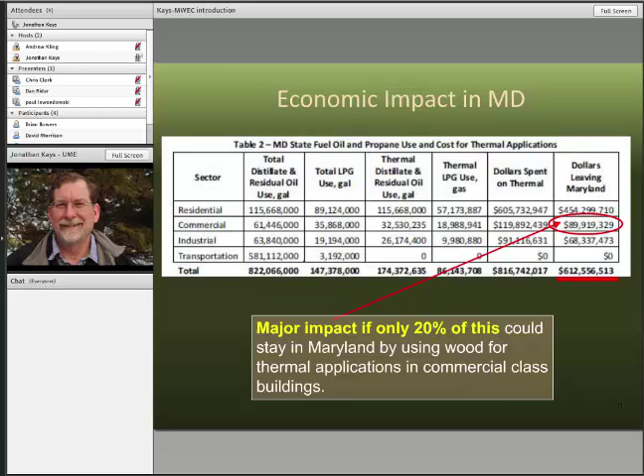So that's kind of what I have to say, except for the fact that when you look around Maryland, there are a lot of opportunities for projects in Maryland with the university, public schools, military bases, government districts, poultry houses, office and retail complexes, and prisons, anywhere where you need a lot of hot water or steam, a lot of thermal heat. And again, the purpose of this webinar is to make people aware of this grant program, to submit some project ideas by the March 30th deadline.

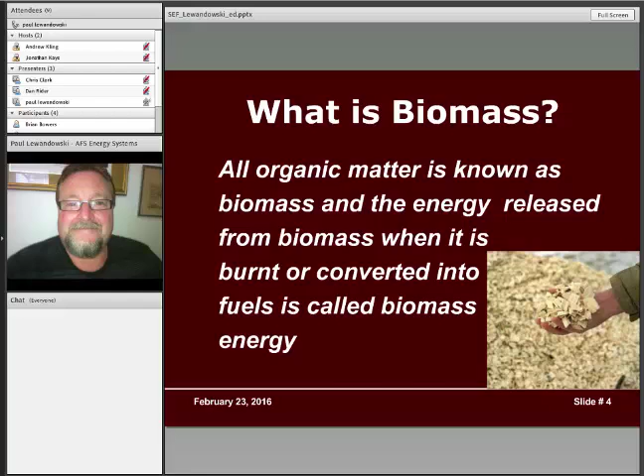So what is biomass? All organic material that can be converted into energy is called biomass energy. So that includes a number of different things. We're particularly going to speak more about the woody biomass, wood chips and other cellulosic material. But it can come from agricultural crops and forest products, industry waste. And this is where AFS Energy Systems really started 30 years ago.

We supported many forest products companies with equipment that would convert their wood waste into steam energy, which they would use to dry their lumber. So they were getting free basic energy. A lot of them used to run fuel oil or propane to do that, and they started to realize that they had a resource right in front of them that they could use to generate their own thermal energy.

So why biomass? Biomass is clean, renewable energy. It's a resource that, and Dan's going to speak to this, when done in a sustainable manner, is very clean, and it improves our environment and reduces the use of foreign fuel. And this is really the key part of it. As Jonathan mentioned, trying to keep those energy dollars in Maryland, and this is one way to do it.

Even just recently, the federal government has recognized biomass as part of their strategy for reducing their fossil fuel use, and along with that, greenhouse gas emissions reductions. Why biomass? Unlike the combustion of fossil fuels, the CO2 that's released by biomass is balanced by the carbon dioxide captured in the recent growth of the biomass. And this next slide really sort of demonstrates that idea.

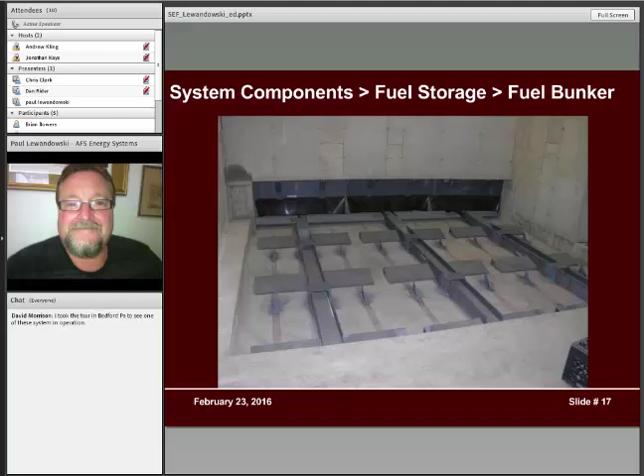And in the bottom of the bunker, we have what's called a wedge floor, and those metal plates that are shaped like a shark fin basically reciprocate back and forth and massage that pile down, and then on the stroke toward the back wall, pull some fuel onto the conveying system. And that's the opposite side of that wall where the hydraulic rams pull that fuel onto a conveying system. A good idea is also to install a magnet to remove any metal in the fuel. It's amazing how many nails and chunks of metal end up in wood chips if you don't. And so that's something that we highly recommend doing.

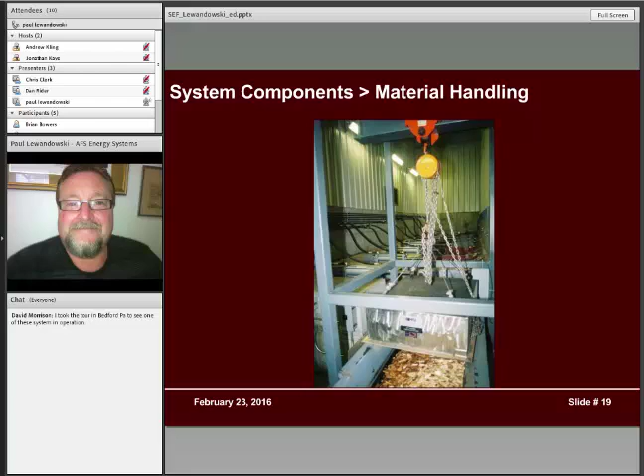The other part is this, for the material handling: this is what keeps the properly sized fuel only getting into the system. Once the fuel has been screened for metal, it is now screened for proper size that will easily flow through the remainder of the fuel delivery process.

With a vibrating or shaker table, sometimes called that, the overs are eliminated from entering the system, and only properly sized fuel enters the next piece of equipment. In this slide, on the far left, you see the properly sized fuel going up a screw conveyor, and on the very end, another rubber belt conveyor where the overs would end up going.

This particular application was one where they wanted it completely automatic. So the overs, rather than going into a wheelbarrow, went up a conveyor, got a full load, and then it would grind it and put it right back into the pile, so they didn't have to touch it. Today, most healthcare institutions, hospitals, and other institutions don't want to handle it, so we have completely 100% automatic systems available.

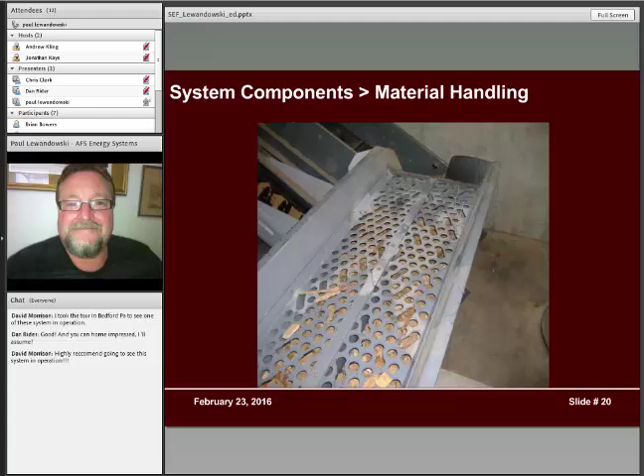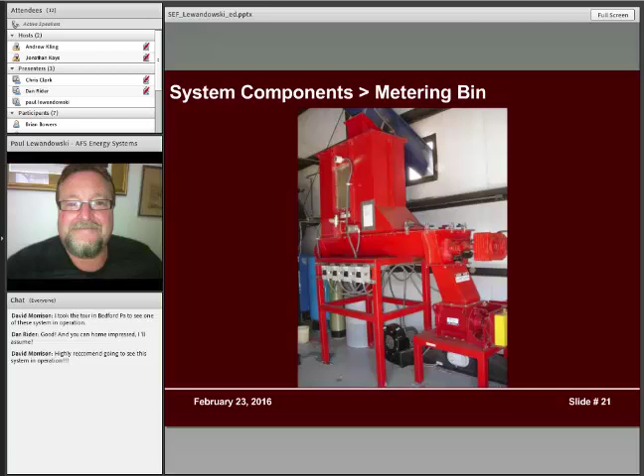This large system was designed for New England, and they wanted a lot of extra wood storage because sometimes trucks have a hard time getting around in the wintertime up in northern Maine.

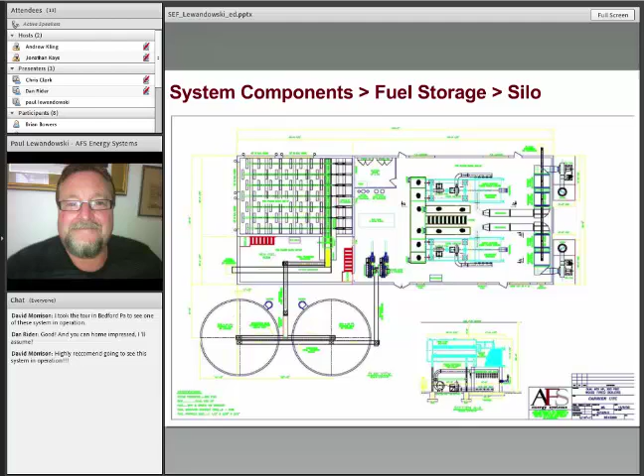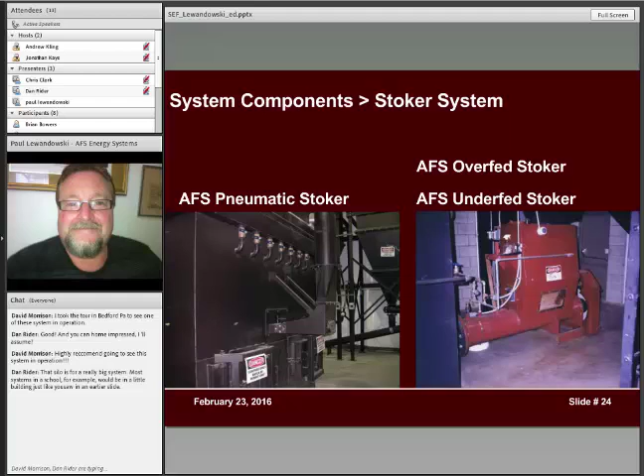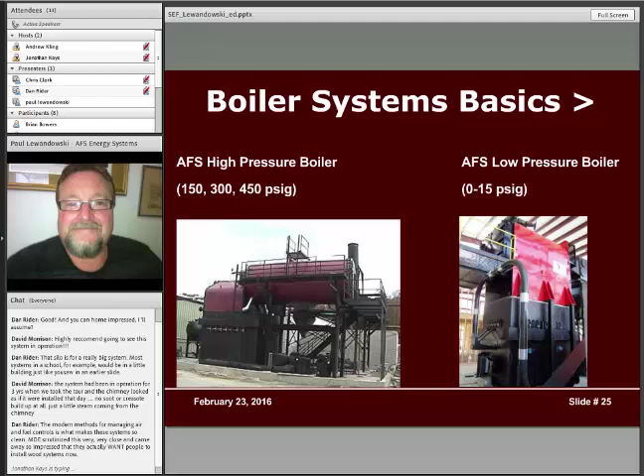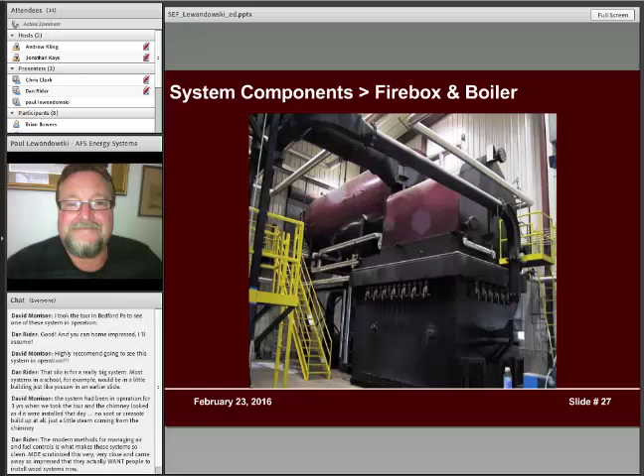This is just some more examples of some large systems. This was a furniture plant, I believe, in Canada. We have some case studies we'll share at the end that show some of these as well. This is another firebox and boiler high pressure application, so there's a lot of opportunity for finding just the right application for whatever situation.

Now, when it's a renovation type situation, then possibly we're having to take the roof open and drop things in, or take a section of wall out and walk them in with a tow motor. It just depends, but this is absolutely the best way to do it if you have the opportunity to build the building first—just put the walls up and drop the equipment in.

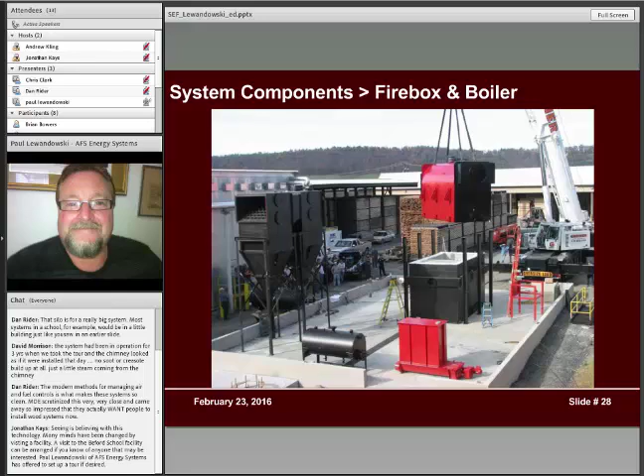The next slide, as I mentioned, the fly ash collectors—they're the first line of defense for providing a clean stack, and basically they are just a tornado being introduced into the center of that system. There's tubes, and the particulates fall out the bottom, and the hot air goes out through the stack.

Those are typically used now as a pre-filter for more advanced and higher efficiency emission controls required to meet the new clean air standards. Bag houses are used for emission control, but they tend to need more maintenance. So really what is being used most now, because costs have come down and the technology has improved—mainly the cost has come down—is that most systems above 10 million BTU under the new boiler MACT requirements will end up with an ESP.

We'll still have a fly ash collector to take the larger particulate out first, and then the ESP as a secondary means. There's no situation that can't be turned into a completely clean system with this equipment. None of the systems we've installed have ever failed to pass a stack test as a result of using this equipment. So there's a lot of things here that you probably haven't seen before if you're not familiar with the technology today.

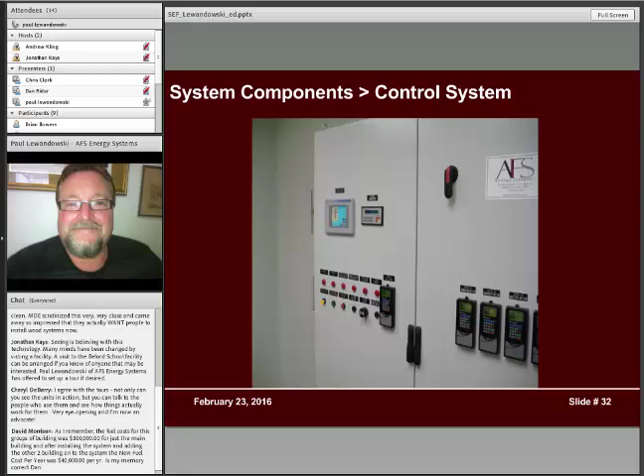So now we've talked about the technology and what's available, and now we want to look inwardly at the application for my particular facility. If you meet certain parameters here, we're going to go down through a list, and we're going to do it pretty quickly. So here's the first one.

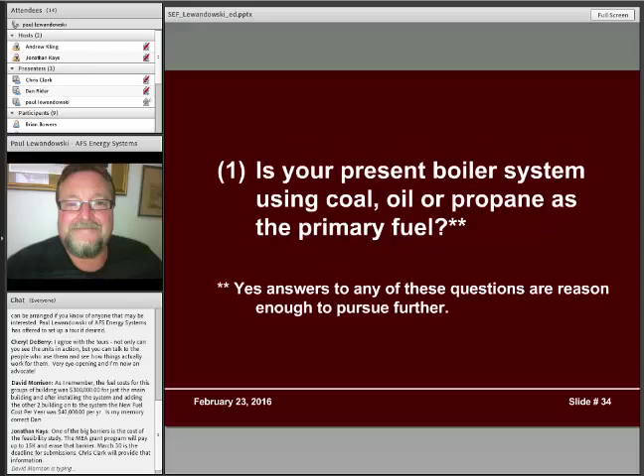Do you have a present system? Are you using fossil fuels? Do you have a central plant? A central plant is the most effective way of utilizing thermal energy rather than separate systems in each building—there's just the economies of scale.

Size does matter. 50,000 square feet and above is kind of arbitrary, but if it's less than 50,000 square feet, it's going to be hard to make a system return on investment work. The more square footage, the better. Let's just put it that way.

Do you have thermal loads throughout the year? Do you have steam, hot water, chill water? If there's a levelized load over the seasons, it's a much more favorable situation for an application of a system. Hospitals have that. Hospitals are a really good application.

They always use steam, and they use hot water and chill water in the summertime. We always throw a question in there that a customer can't say no to: of course you want to try and control the future impact of rising energy prices. Don't be fooled by where they are right now. This is a direct result of basically an oil cartel trying to drive a bunch of American companies out of business, basically declared war on us. And this is not going to last.

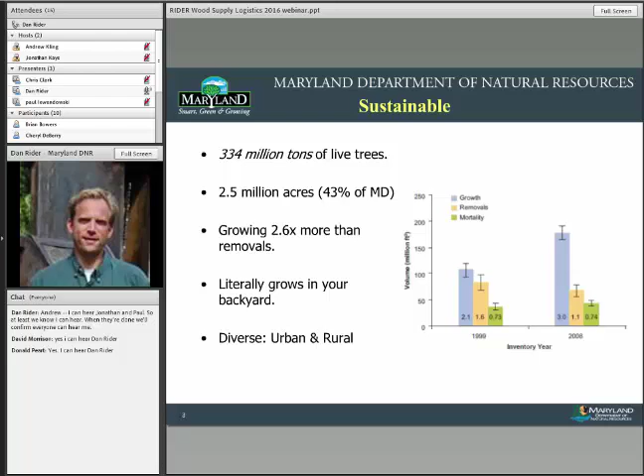I won't go into many of these details on this slide, you could look at them later. If you're really curious, get a hold of me and I can bury you in details. But suffice it to say we're growing about 2.6 times more wood than what we harvest or what dies naturally, across the state. Trees literally grow, and your fuel will literally grow in your backyard. Go to any window in Maryland, look out of it, and you will see a tree.

So the arborists, in Maryland we call them tree experts, tree trimmers, whatever. These are the guys that run around, usually in more urban areas, and trim trees that are problematic for whatever reason. They cut them down and throw them in the back of the truck as fast as they can, in whatever form, and haul it away. Their goal is simply to get rid of the tree. They get paid to remove a tree, they don't get paid to deliver wood. So any system in the neighborhood that would stand itself up to consume wood as fuel, these guys would absolutely love, and they'll beat down your door to become one of your suppliers.